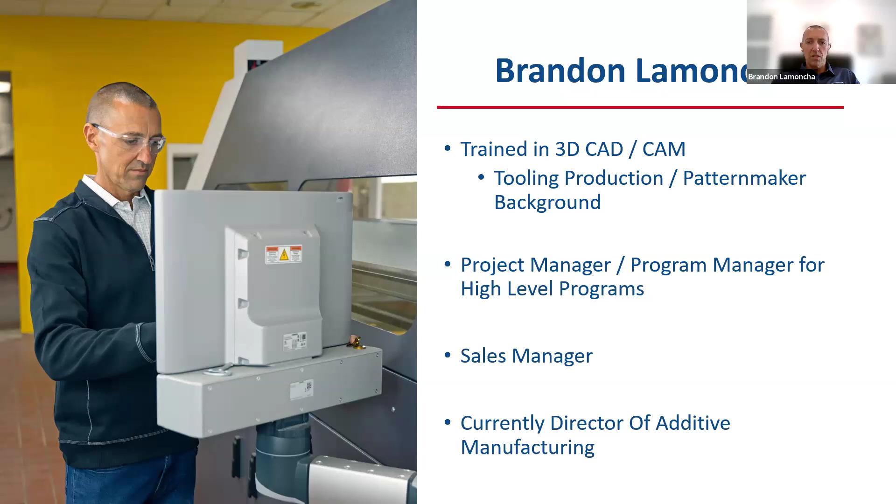As Bo said, I've been with Humtown. My grandfather started the company in 1959 as a pattern shop. I started gluing up segments for wood patterns and learned how to do everything conventionally, then started getting into CNC. So I have a good understanding of tooling. That led me to project management, sales manager, and now I'm currently the director of additive manufacturing.

We would load trailers and ship semi-loads of cores to foundries all throughout the Midwest, typically within a 500-mile radius, but sometimes further. I mean, we've shipped conventional cores all the way to Mexico for prototype projects.

So that's who we were. We were a core manufacturer primarily. We used to make CNC patterns and hand patterns, but we no longer do that. That building now is just a service shop. We keep our core boxes running good, changing out vents, cleaning them, et cetera. But we have no more CNC capabilities, and we'll talk a little bit about that in our journey.

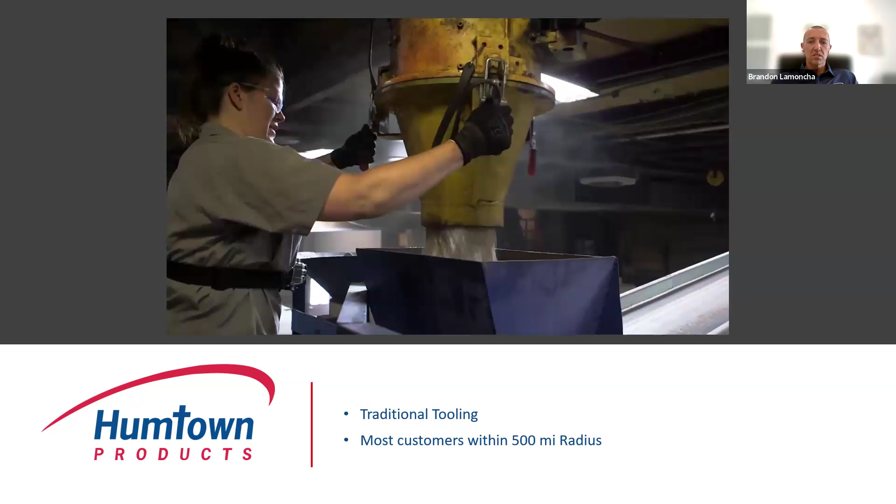Many of you have core rooms in your foundries or you've been in them, but rows and rows of tooling. Every single geometry needs its own tool, which is obviously a large investment. Sometimes Ren board, sometimes iron, sometimes aluminum boxes. But we have a central mixing station where you mix the sand and put the binder in.

And send that off to each core machine. It has a magazine - this is a horizontal blower. The machine closes, the sand is blown in under air, and then the gas head comes over, and we use dimethylethylamine gas to cure the cores. And you're able to produce a core rather quickly, sometimes in less than a 1 minute cycle time.

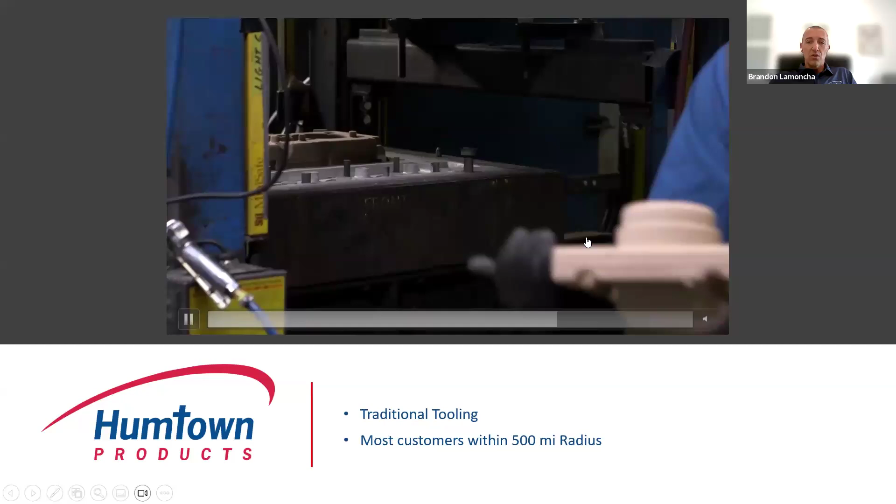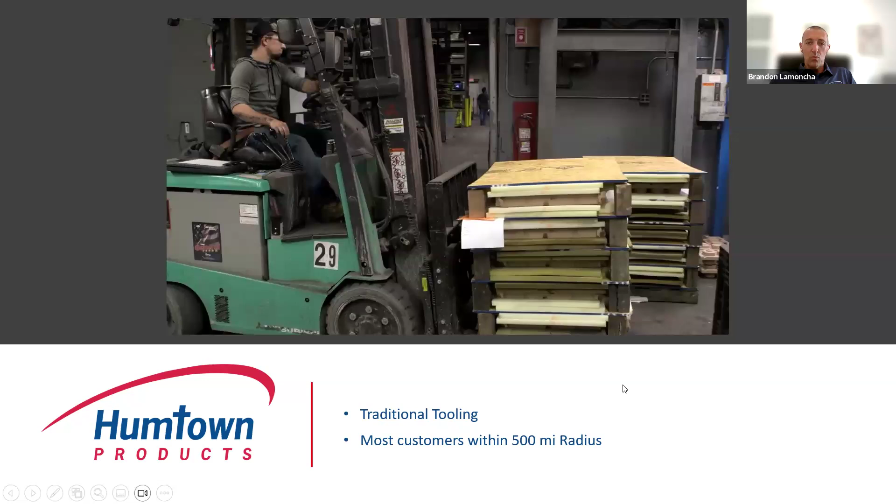So this type of core making is still - we make cores every single day at Humtown, just like you make in your foundries, and we supplement foundries on core supply, and it still works really, really well for high volume. Today we'll talk a little bit about where we're transitioning to 3D printed cores versus conventional, but that was our process for many, many years.

When this all started, just like you on your journey, we started looking at what is additive manufacturing. We started this journey back about 10 years ago now. Started looking at it primarily for tooling, and as you see on the right, we have a core box here with some intricate loose pieces.

Typically those would have been CNC machined, 3-4 axis machining, multiple setups, and very time consuming. So we started making stuff on a MakerBot and just tinkering around, seeing what could we do, how could we do it, what were some ways of process improvements for making tooling and inserts and loose pieces, and it worked really good.

And then we jumped up to this Stratasys machine, which you see here, which was a very good piece of equipment in its time. The consumable costs got to be really, really high, and they were kind of locking down their consumables. So we ended up pivoting to what you see here on the left.

We saw the additive manufacturing binder jet process versus the FDM, being able to actually skip the entire tooling phase and just jump right into 3D printed molds and cores that we could then supply to a foundry. They were able to take those molds and cores and literally pour a casting in days. So this really caught our attention.

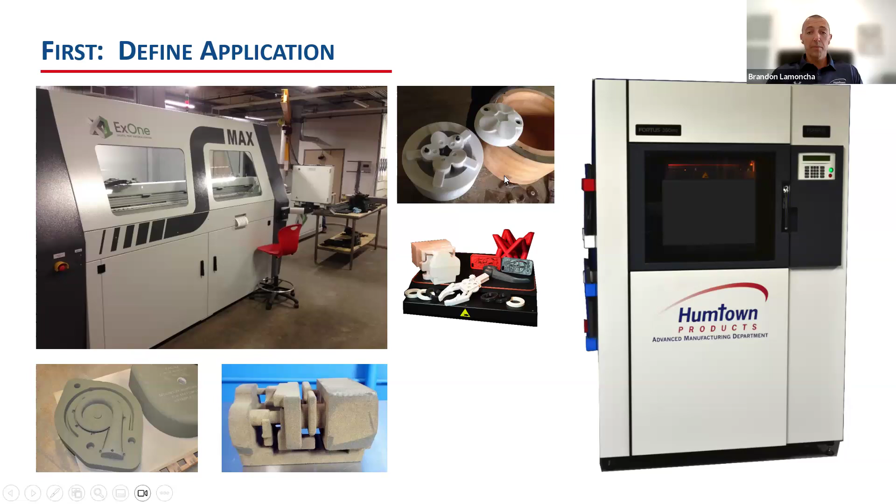We no longer have the Stratasys. We no longer make tooling. Now we're all in on binder jetting of silica sand, and well, we'll talk about some of the other materials.

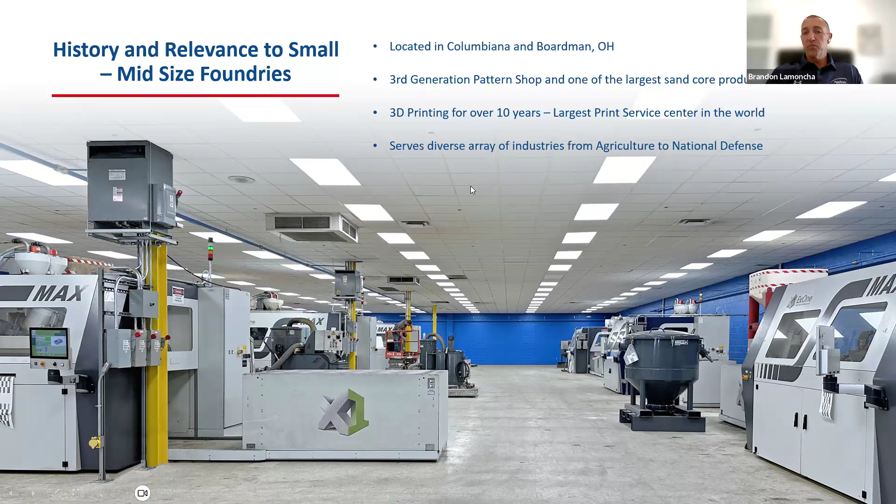But this is a little bit about us. We have two facilities, as I mentioned, one in Columbiana, one in Boardman. This is our third additive manufacturing facility - we'll talk about that journey and how that looks. Like I said, we're third generation, one of the largest 3D print service centers in the world, and we serve industries all across the spectrum.

Early on in this journey, as many of you are looking at either getting machines or maybe just getting your first or second printer, we saw that there wasn't a huge adoption of additive manufacturing in the industry. I would go out and purchase cores from ExOne or one of the service providers, and we would do the design, or find the application, and work with our local foundries to get it printed somewhere and then bring it in.

And we saw the benefit of it right away. Hey, we don't have 8 to 10 weeks to make tooling. We can make highly complex cores.

What we wanted to do is get more and more people understanding that this technology exists, but we didn't know how to get the message out. So we approached America Makes. We were very fortunate to have one of the first innovation institutes placed right in Youngstown, Ohio, in our backyard.

So we went to them with this dilemma. They were asking for project calls, and we said, hey, we want to use this technology more, but these assets are well over $1 million. We don't have the capital. We can't secure a loan. At that time, nobody would loan on this bleeding edge, cutting edge technology.

So we said, how do we go about this? We put this project call in. We were assembled with a team. Our team, it was incredible.

We had obviously the AFS, we had some local foundries, some local pattern shops, some large OEMs like Caterpillar, resin and coating companies like Refcotech, and some really great partners like University of Northern Iowa, Youngstown State University, YBI, even the machine manufacturer ExOne. So we all came together and said, how do we solve this high overarching problem?

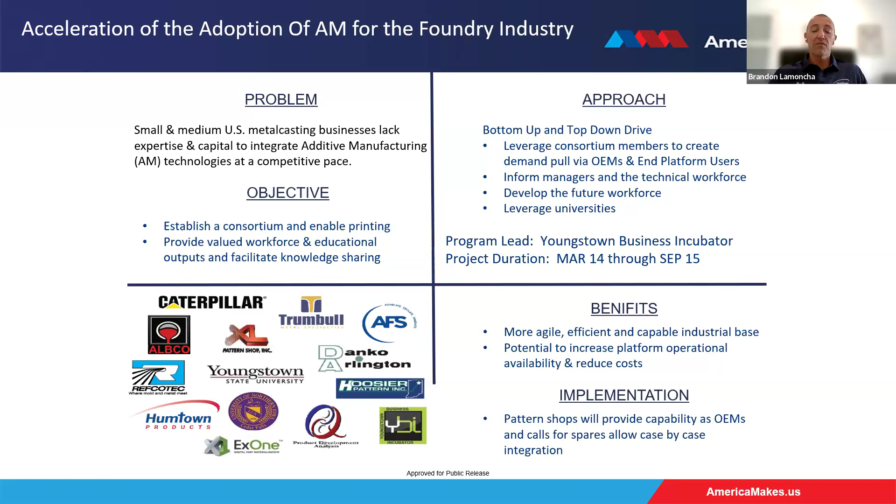So a really good team came together to talk about this, and what it ended up doing was actually getting the first printer through Youngstown State University for another project call, and that's kind of how we got our footing in this technology. So team-based approach. We didn't know where to start, so we came together and used an organization like America Makes, AFS, to build this as a platform or a bedrock.

So for some of you that may not understand what binder jet 3D printing is, no problem. Very simple process. We basically lay down a layer of activated sand. So we take silica sand, ceramic, carboceramic - some of the trade names - but ceramic or silica media. We mix it with an activator.

That's all activated. It's all spread out on the bed. The print head comes along much like your inkjet printer at home. Instead of having HP ink in there, we actually have a binder, a Furan binder. There's other binders - we can talk about that later - but we primarily at Humtown are only using Furan at this time. Basically, the print head deposits that just like on a sheet of paper.

It shows what it wants to print. What you see here, the green, that's actually being deposited. That's what's going to become the core or the mold, and then that process repeats over and over again. 700 millimeters tall, and we typically do that at like a 0.28 millimeter layer thickness. So the job box takes roughly 18 to 20 hours to complete.

We depowder it. All the white that you see is loose sand. We vacuum that away. You're left with the green, and that's basically your core or mold.

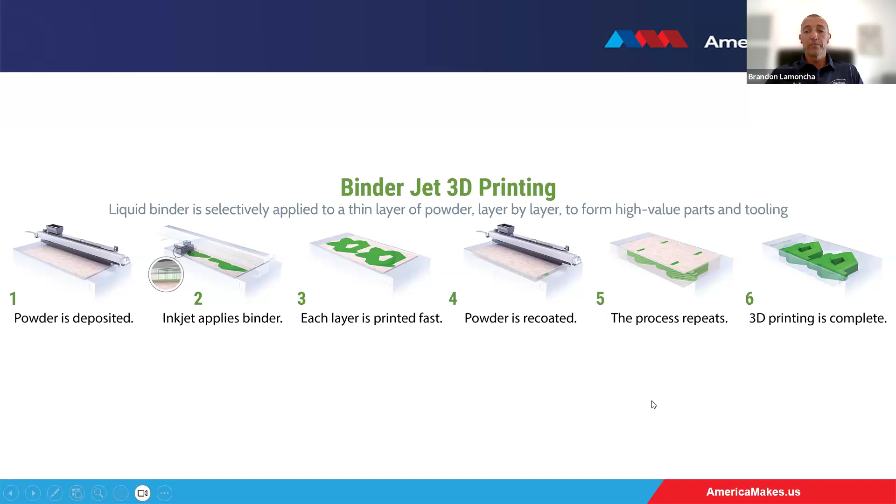When we got into this, as I mentioned, in 2014 these were the players in the space. If you wanted to buy molds at that time in the U.S., you basically had to either go to ExOne, the machine manufacturer, or Hoosier Pattern. That was pretty much your options.

We started as Jerry Thiel at UNI put his first printer in at the university. I drove out there, met with Jerry. He had this technology, but he didn't have someone to actually go out into the industry. So I said, put me in, coach.

So I started driving all over the country, printing molds and cores, and getting these cores and molds many times as samples or very low cost projects, getting them into foundries so that they could pour metal and get a casting and show the people in their organization the value of additive manufacturing.

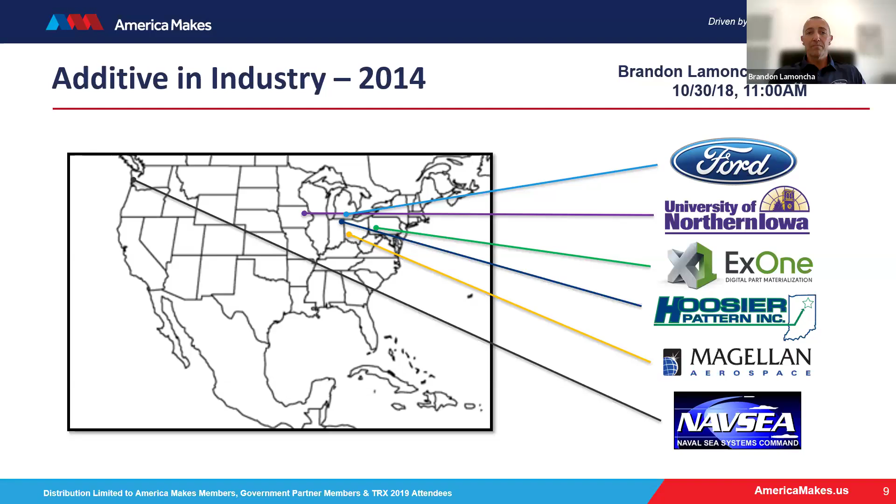Now, since that project and over the years, I need to update this - this slide was back in 2022, but there are several more. We know we have over 100 printers in North America, Mexico, Canada. They're all over - OEMs, universities, foundries, you name it. They're there.

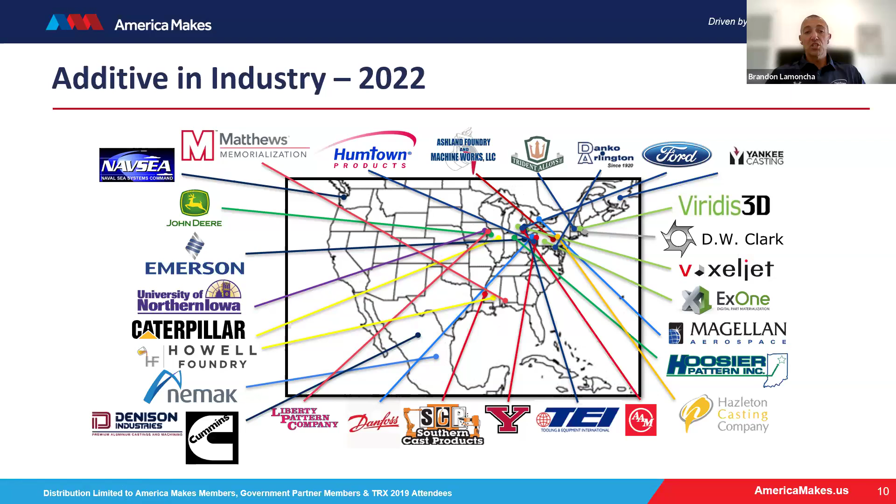This has been a really good, very quick adoption, I would say. Once we got the ball rolling, there's hardly any foundry now that hasn't used or seen a 3D printed core. That's due to some of the work we've done, but also suppliers in the industry like Hoosiers and Matthews, and OEMs like Cummins, Emerson, and Caterpillar have done a great job putting these machines in and showing the industry what they're looking for in application and design. They've done a really good job of educating the industry on what they need and how to achieve it. So this was our first facility for 3D printing.

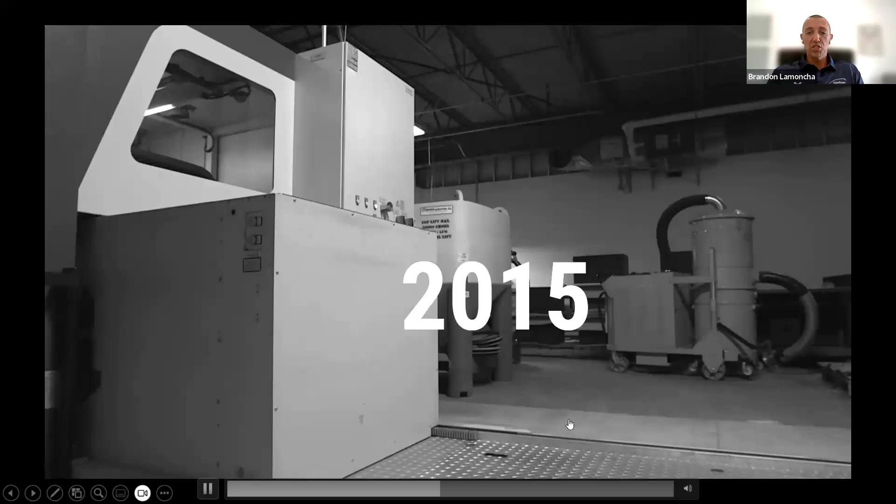We were maxed out where we were. We thought we were going to have a lot more engineering and design, and we only put one printer in through the help of Youngstown State University and the America Makes project. We put that printer in at the end of 2015, early 2016, and started printing, and it was an incredible success—or incredibly lucky, whichever way you want to look at it.

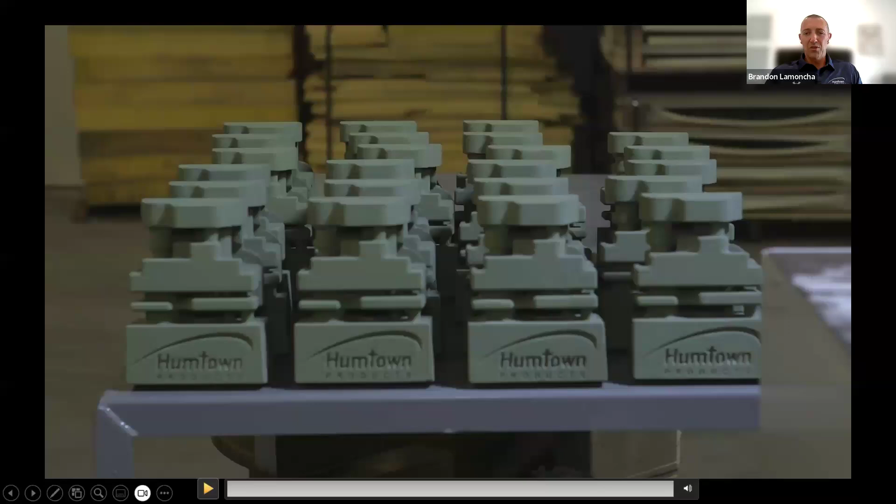We had some customers that were really pushing this technology, some OEMs. Basically, from the time we started printing, that machine ran 24/7, 365. It was incredible. My father and I would go in at 1 o'clock in the morning to clean the machine and flip it over to get the other job box in. It never stopped. I think we still may possibly hold the record for a Furan printhead—over double the recommended life, but it just ran, like twice the life expectancy. So we were very fortunate to get in at the right time when these OEMs and customers were starting to really use the technology.

So we put that machine in, and it quickly took off. What were the benefits? What did we learn by putting that first machine in? Why were we so successful, or so lucky?

Conventional tooling at that time took 12 weeks. Now I'm hearing pattern shops are out 12, 14, 16, 18 weeks. You judge for yourself—maybe you have your own pattern shop and can get tooling in 12 weeks, or 8 weeks, or 4 weeks, and that's great. But what I'm still hearing is that tooling takes a lot of weeks—4, 6, 8 weeks.

We were able to do that, but we were also able to get a casting made using 3D printed sand—with the design, the gating, the simulation, everything, inspection—and get a finished part to our customer in less than 3 weeks. What that did was allow us to get that part to them, get it machined, get jigs and fixtures set up, even in parallel while they were making tooling. And if there were any design changes or iterations needed, they could scan the casting and make that change possibly before they even finished cutting the tooling. That was one of the biggest benefits we were seeing at that time.

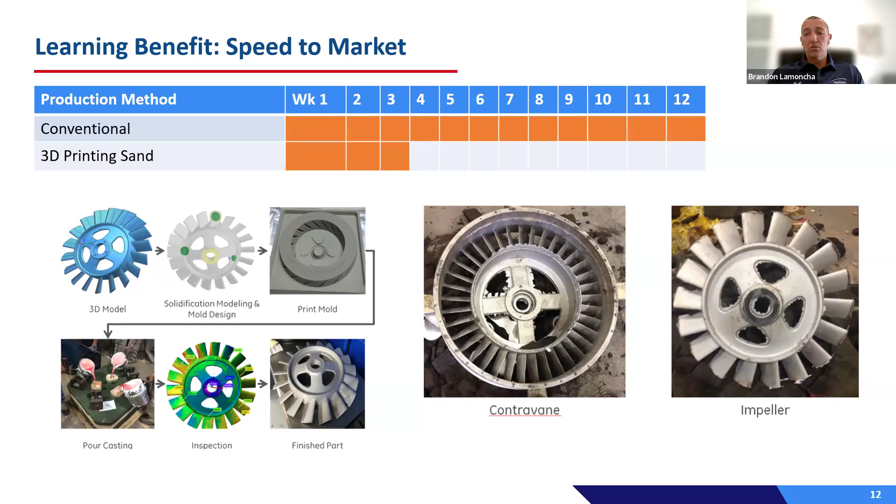New product introduction and prototyping—that's what was really taking off early on in the technology. Then we learned about the benefit of consolidation of parts. When we started taking core assemblies—taking 8 separate cores that required 8 different blow cavities, whether that was 8 individual core boxes or 1, 2, or 3 family boxes to blow all those cores—then bringing those back to an assembly room with jigs, fixtures, glue, scrap. And think about taking that back: one core breaks, and you have to go back up to your production room, set up a core box, and blow 20 more cores because they went scrap in assembly. It was a nightmare. So this is the second sweet spot, but we're starting to see this now even overcome new product and prototyping. That's really what's getting Humtown and a lot of these 3D printing companies into serial production. So I implore you to go through your foundry, start and finish, or the core assembly room.

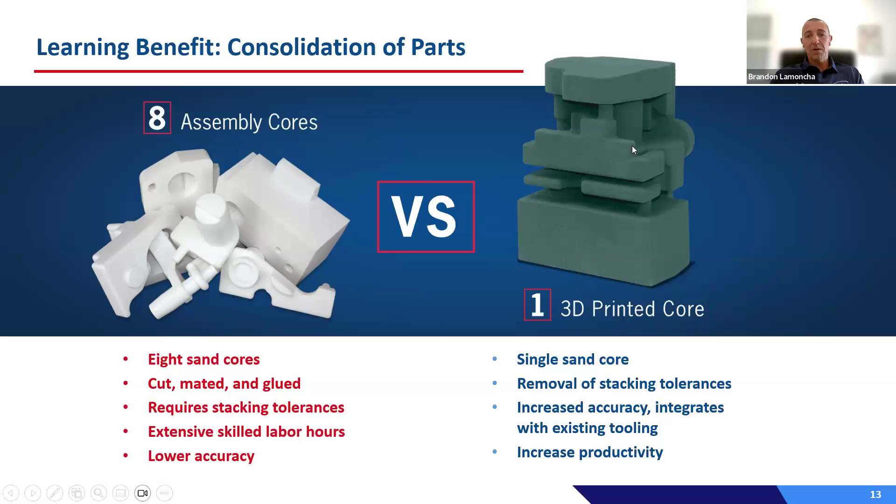If you're doing assemblies and it fits in your hand, I can almost guarantee you, if we did a time study and a case study on it, this core was so much less expensive 3D printing versus doing the assembly. So once this started taking off, it really started to grow in our journey, and it really started to fill up 3D printing machines.

So a lot of people would say, oh well, are you able to do large prints? And yes, the answer is yes. This is me, I stand about 6'4". That mold package, I think it was over 31 different prints, or 31 different pieces, between the outside mold and the cores, and it was pinned and bolted together. You can see the all thread and the bolts. This was made, I think it was over a 6,000 pound casting.

At that time when we were doing NPI and new prototyping, we were starting to see a lot of use with 3D printing, because imagine the tooling that it would have taken to make all the internal cores. I know I can't show you what the casting was, but you can imagine this is a very large, intricate casting, and we had a lot of internal cores, and to make all that tooling, it would have taken months.

Whereas with 3D printing, we were able to get this mold package within 30 days, a lot of printing, but we were able to get it to them. At that time, it was relatively quick. We had one printer with one job box at that point. Now we have 12 printers in Ohio, and we'd be able to print that pretty much in a week, all the different pieces, and get them packed out and get them there.

This process is incredibly accurate. The machine manufacturers promote plus or minus half a millimeter. We see that a lot, and we've dialed it in on production jobs even tighter.

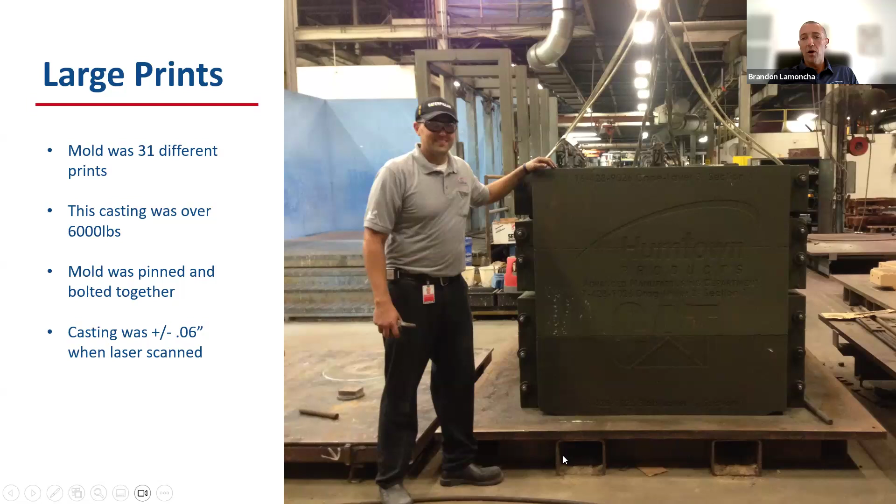So as we're making this journey at Humtown, we're starting to learn more and more of the use cases. We're starting to see, okay, speed to market, great, everybody can appreciate that, but that's just one. And then the core consolidation, okay, makes sense, great. But this was one that kind of crept up on us as a necessity.

We get this tooling in, and I'm sure many of your foundries, you get legacy tools passed down. This was for an aerospace part, and this is probably a 30 or 40-year-old tool. The platform was supposed to be retired, never was. We're still making service parts, and the tool was at end of life. We went back and said, hey, we need new tooling. They said, well, we can't get the budget for that. We don't have any files, we don't have any drawings. All the things I'm sure everybody on this call has heard at some point.

Well, what we decided after about 3 or 4 days of trying to blow this core, using silicone and trying everything we could to create a chamber to blow a shape, we ended up deciding to just pour repro, scan it, got an STL file, and 3D print it.

And we approached our customer. We told them, basically, we're done trying to make tooling or make this tooling work, here's your options. They went to their company or their customer and showed them the option. They had to do, I'm sure, a lot of testing and first article, whatever the case may be. But now the production method of this part is a 3D printed core, and it's working very, very well.

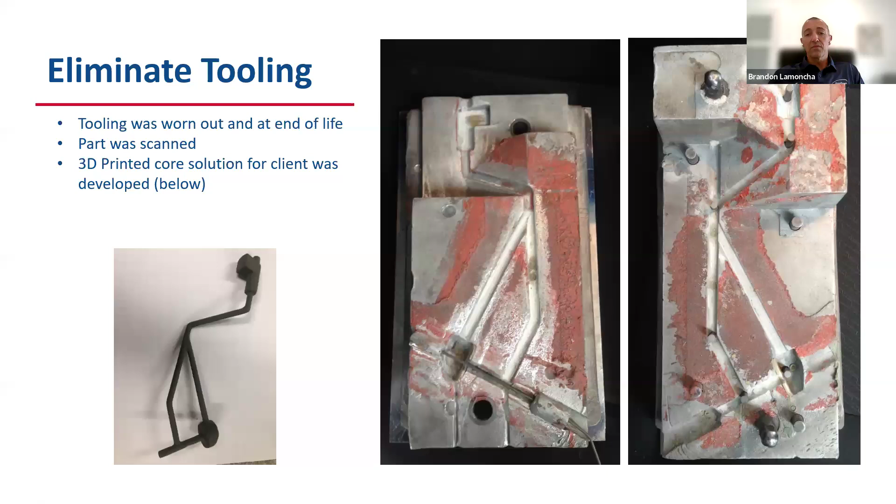So this was another use case. As you are taking your journey, you're going to have different, but a lot of us in this industry are going to have a very similar journey in finding use cases for additive manufacturing. So if I can help you in your foundry, or look at your OEMs that have problems like this—lost tooling, damaged, worn tooling—additives can really be a solution to those, as well as some of the other obvious ones.

We do a lot of hybrid projects now. 3D printing is still expensive. I'm sure there'll be some Q&A on that, and that's fine, that's what we're here to talk about. We're trying to solve those problems with the machine manufacturers, et cetera. So what that's driven us to along this journey is, like, I thought we were going to do a lot of engineering and a lot of printing.

So that beautiful office space sat unused, because what we've seen is more and more of our foundries and OEM partners are doing a lot of the CAD and simulation themselves, and then sending us ready-to-print models. But they're also realizing these molds can get pretty costly and time-consuming to produce. So if they can make a pattern and just use the internal shape, like this turbo housing, to produce the performance they're looking for, that's what we're starting to see more and more of.

So what that's led us to is a huge amount of our projects using 3D printing in a hybrid manner, where you still use your existing pattern. This has been a great find, and it's a way that's much more cost effective for the companies and customers, because they're not having to buy a whole 3D printed mold. They're using their traditional air set line, so this is much closer to their production cost.

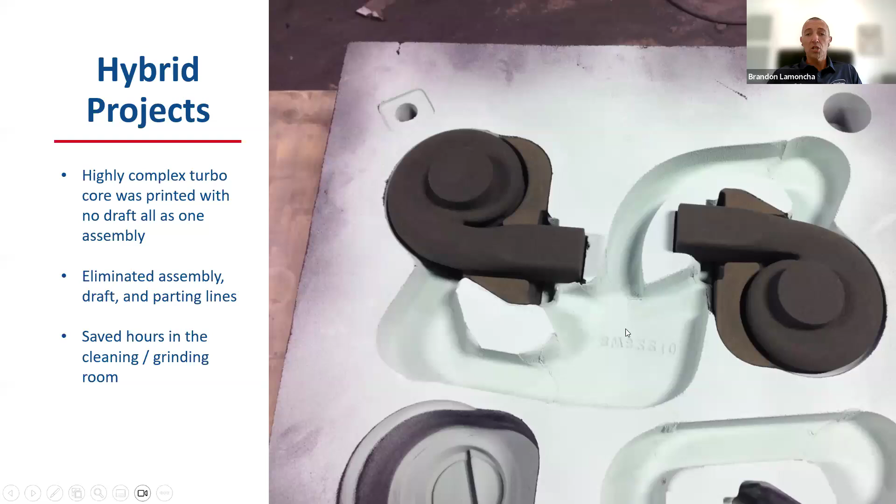Another hybrid would have been this engine application. This was a 351 Cleveland block, and basically they wanted us to go ahead and make a different cooling channel. It was either overheating, or they were trying to push the performance, or thin wall. We wouldn't have been able to blow this core conventionally. It had some really thin areas where we couldn't get wet, sticky sand to fluidize and get into those areas.

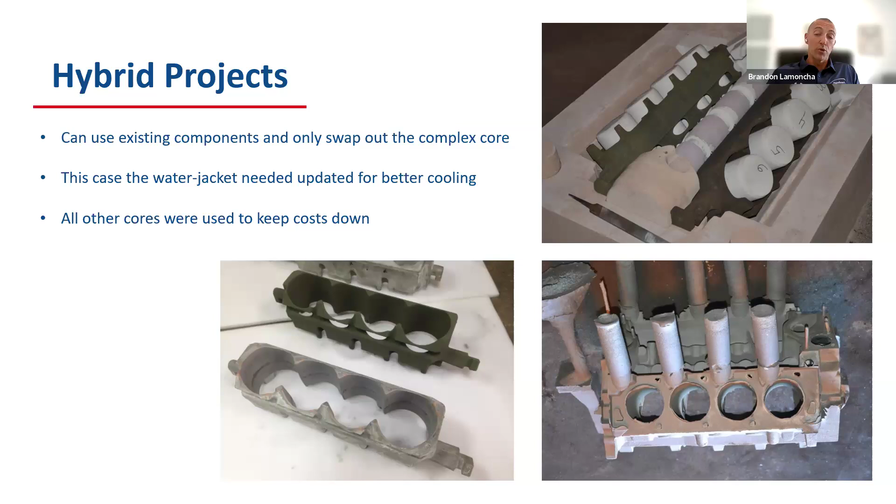But what he did was he made some modifications - he poured a plug off of the existing box, made his modifications to the plug, scanned it, and within a couple of days, and for maybe a couple hundred dollars for a set of cores, he was able to have a custom design. Obviously he did the design time in the CAD, but we did the printing, and it was like a couple hundred dollars or so for cores, and he had a custom one-off 351 Cleveland block. So this is just another example of hybrid projects that would be very costly if you went the tooling route, if you could even blow it. But it was solved by additive manufacturing.

So that's what we're starting to see today. We have castings that cannot be made any other way than using 3D printed cores. They're made in a hybrid fashion where it's either a permanent or semi-permanent mold with a core that's 3D printed, or basically just this core, and all the outside shape is made with your regular air set sand. That's what's really pushing us and others into serial production, because even if you could make a tool, no matter how long it took, you still couldn't blow a core and achieve the dimensional accuracy that we were able to achieve with 3D printing.

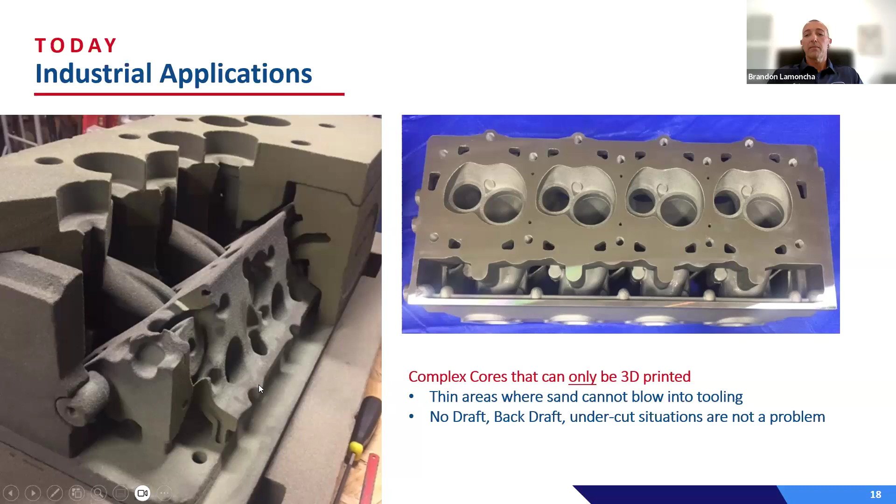So with that being said, that's taking additive manufacturing, and we look at it as a whole. Basically, if you have any investment casting knowledge or operation, they've been doing this for a while, printing wax patterns or PLA, dipping it in slurry, burning it out. So we're not quite as advanced as the investment cast folks, but we're catching up. We've been in this long enough to see that.

People now that haven't used or adopted this technology are really in the late majority. I consider Humtown and some of the other companies on that slide to have gotten in early. I wouldn't say we were developing the printers, we didn't come up with that idea, but we were visionary, seeing that there's something to this technology, there's a reason why these printers are there.

Ford Motor Company was using them to develop things like the EcoBoost engine, making four different designs, casting 20 different blocks, machining them, putting them on test engines, and then going to production with the one that performed best.

There was a reason those were being built, and a lot of people were involved in our AFS additive manufacturing when it was an ad hoc group, as it became a committee and a division. I commend those leaders, and I commend people still jumping in and learning more about this. But we're definitely starting to see more and more foundries and OEMs using this, and we're getting into that late majority.

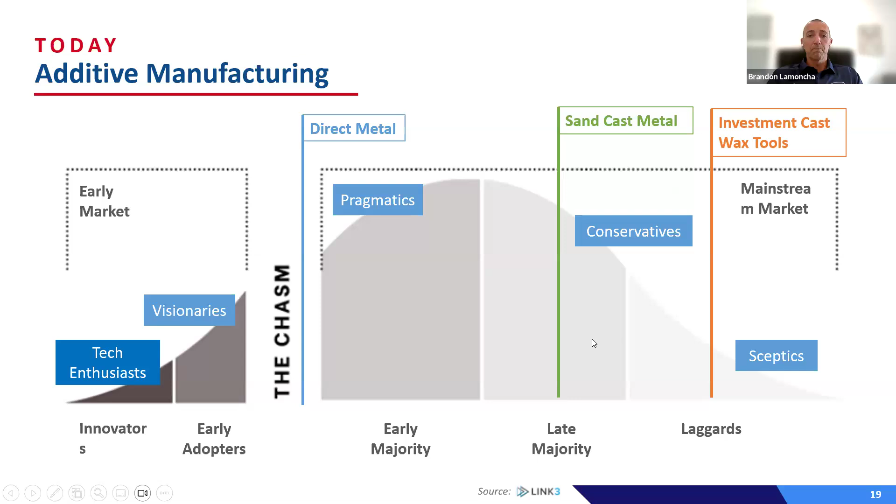This is for the lower power steering unit. The motor stays stationary, and the lower unit turns the prop. Very impressive. I think it was the first, and to this day I think it's still the largest horsepower displacement engine

available as an outboard. So very impressive, the technology. I mean, you can imagine how precise that casting would have to be, and using additive manufacturing for that core helped drive success. I thought that was really cool, that was an AFS honorable mention, and they were able to share that story.

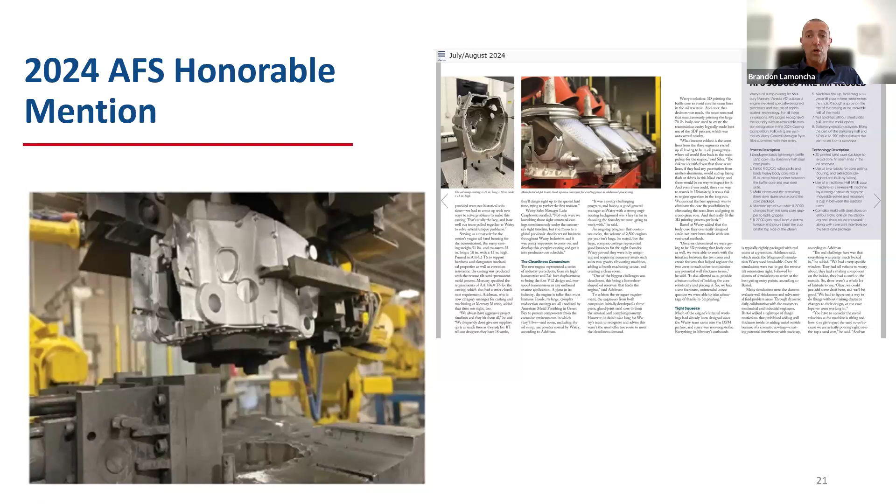As more and more of you see this technology being deployed, and know that there's a supply base out there, you'll start using this in your foundries as part of your technology, part of your solution set to your OEMs, and you'll be supplying OEMs like Mercury, like Ford, now that this technology is working. What we're starting to see, there were rumors that foundries won't be here, that they're going offshore and everything.

I can't say for 100% fact that it's because of additive, but I think it lends to the discussion. So I think we all just need to be aware of that and understand what our foundry is really good at. What can we use this technology to help advance us, so that OEMs, or whatever product is being produced, it lends us to being a supplier to that OEM. And how can we use, whether it's 3D printing or other rapid or more precise manufacturing methods, in our organization to improve our value to the OEMs.

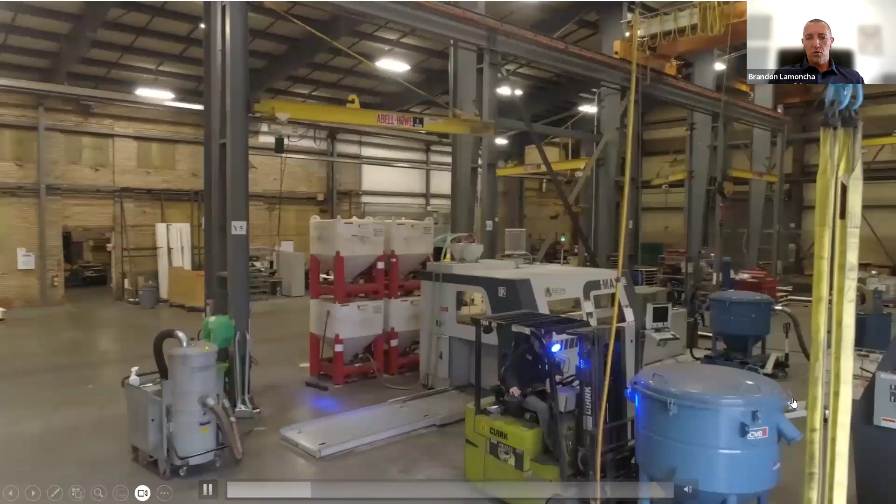Here, let's fast forward a couple of years. This is our second facility. We leased this space. Primarily what you're going to see on the right-hand side is our printing area. Some of this was packaging and storage, but this was when we got our second machine. This area, as you can see, was very laid out, had packaging, clean chemicals, and our sand storage for the day and for the week was there.

But in a really quick time, you're going to see that was 2019 that we moved into that space. As I mentioned, this is pretty much the print room. It was filled with printers, but we had some of our packaging returned, and a lot of this space up here was not ours. This was kind of a mixed use leased space. But you can see from 2019, when we moved our second printer in, because we outgrew the first facility, we moved our second machine in 2019.

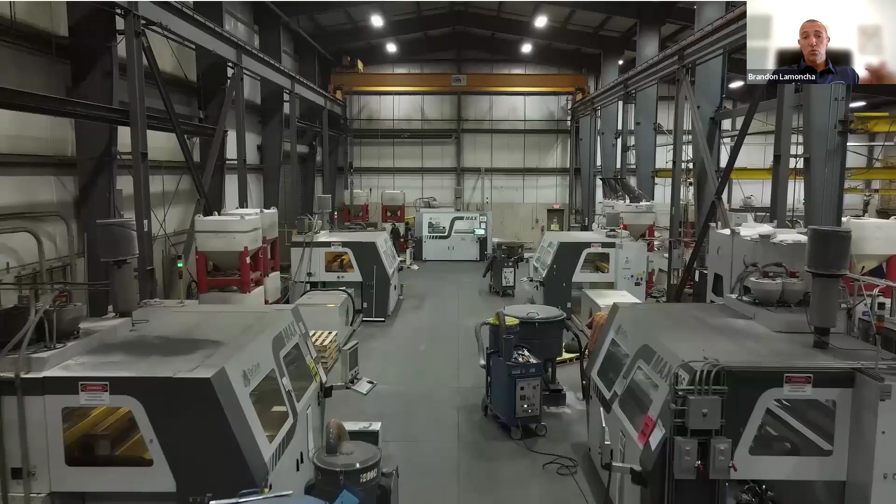Fast forward to 2022, let's go through here and count. We had 2, 4, 5 in this bay, 6, 7, 8, 9, 10. So at that time we had 10 printers in that building, going from 2019 to 2022. So you can see how there has been an incredible amount of growth in just a very short time in additive manufacturing.

We grew organically. We didn't have large investment. I will talk about it, but we have several printers that are managed assets, so they're not all Humtown owned. But we had to really pace our growth, because there were times when there was more work than we had printers for. We were on 24/7, actually 24/6. The 7th day on Sunday is usually optional, not mandatory. But the printers run.

So we had people leave at midnight essentially on Saturday after getting all the printers running. Sometimes we'll have people that volunteer to come in on Sunday to keep the printers clean and moving, but they can run basically 18 to 20 hours. So they would just get them all running when they left, and then when they came in Monday morning, they're basically all ready to empty. But still, this was a very rapid growth of this technology.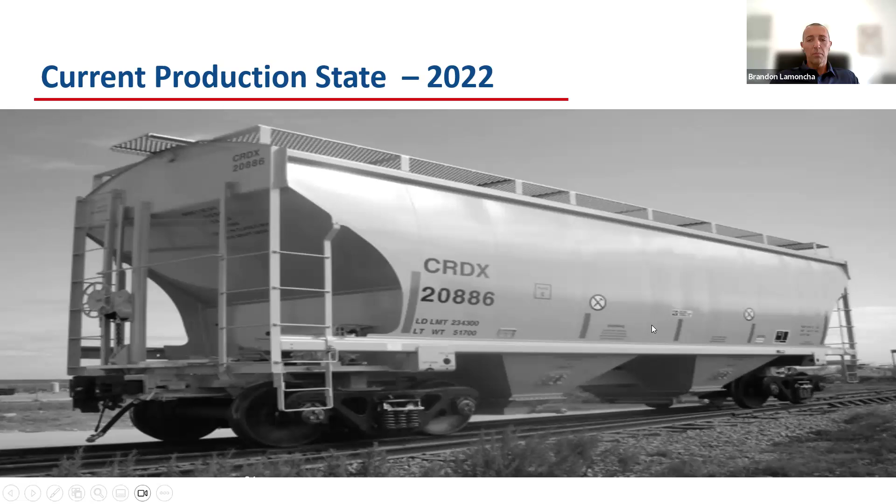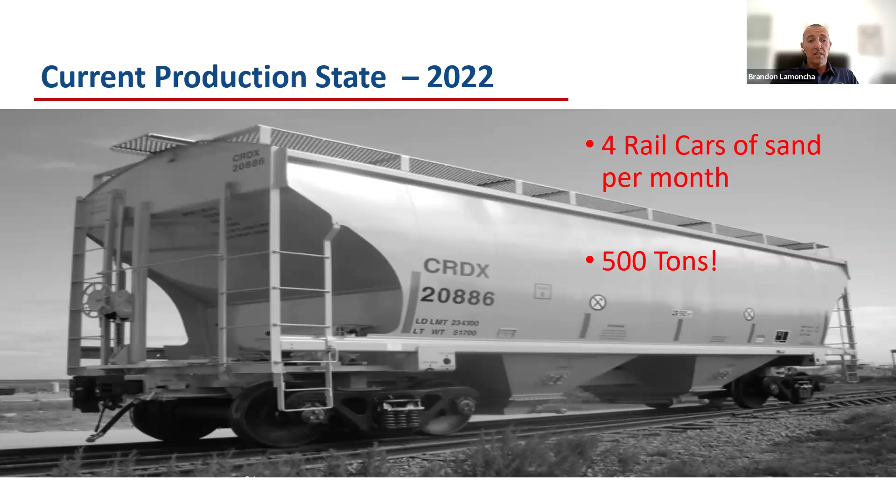So in 2022, like I said, there's a couple of slides here I need to get more updated, but we had 10 machines in there. Now we have 12 machines, so it's gone up a little bit. But we were going through 4 rail cars of sand per month, 500 tons of sand, which is absolutely incredible. And this is not just for prototype anymore. This is serial production, and we're starting to see all the stories. If you listen to some other webinars and come to some of the AFS committee, Grede and some of the other Waupaca, they're putting machines in and they're running production.

So as I mentioned, we're along this journey. We've added since 2022, a couple more machines, and we have a couple more coming. So we did finally decide, okay, we're releasing that space. A space became available, and it had air conditioning, which matters when you're running this process. Any of you that have 3D printers know this production, the process is really, really stable when you have good constant humidity and good constant temperatures.

So finally found a facility that became available for purchase, and we ended up procuring this building. It has roughly 80,000 square feet of production and office space, so we have room to grow and to add printers. But we've also realized that we'll probably hit a cap for what we can do in this area, and we'll probably need to get printers closer to point of need where some of our clients are.

So this is our new home. We just had an AFS tour there. We have the 12th machine in, and we're waiting on some parts to get it up and running, but we do have all the machines installed, in place, and wired in. Everything's ready to go. We're currently painting the floor. This was formerly a Gorant chocolate building, so there are still 3-inch lines of chocolate from when they shut the boilers off.

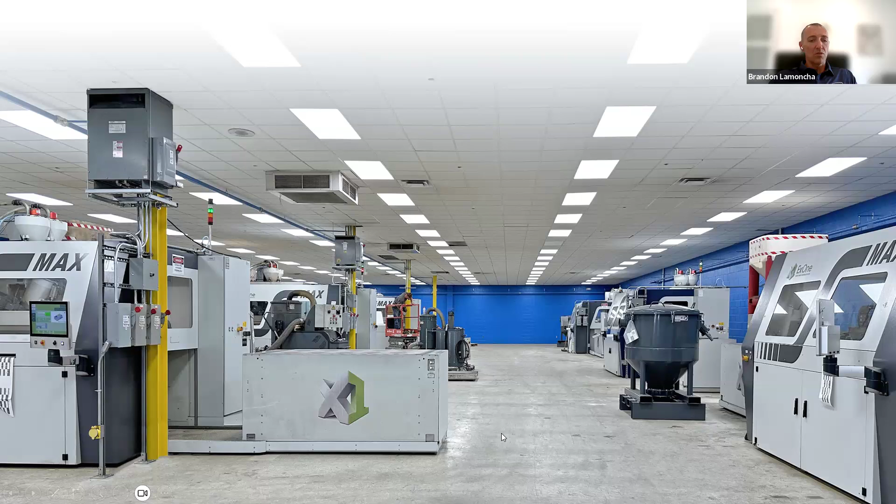It was air conditioned for that purpose, and the employees are very happy about that, as well as the machines in the process. But we had a great tour, everybody that came through was very impressed. We're still finishing up moving in, we literally moved the last machine in just a month or so ago, so we're still kind of new. We had to do some painting, and we're still painting the floors and getting it cleaned up. But I invite you to come and visit us, and we'll show you where we're at on our journey and how we can help. We're very happy about that.

This cell was set up and operational in our other facility. It's been moved over, and we're working on setting it up. But what do you expect to see moving forward as you go on this journey into additive manufacturing for serial production?

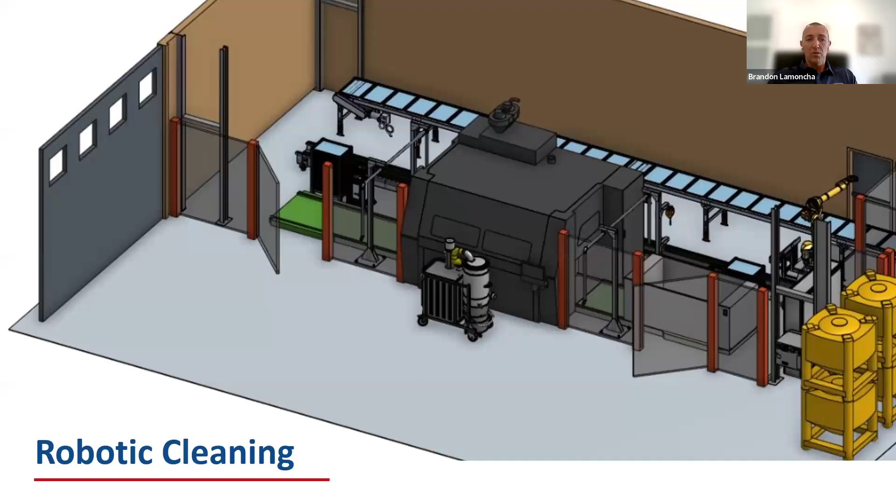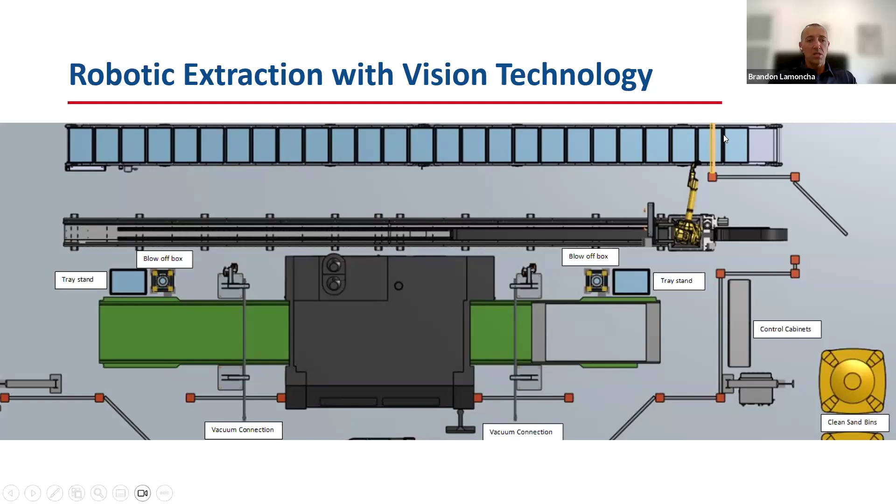We're really focused on robotic cleaning. Some of these jobs, as I mentioned, we're up to 80,000-90,000 EAU of parts, and that's a lot of pieces for people to have to manually reach in, grab, clean, inspect, and put on. So what we're starting out doing is we have 2 job boxes per machine. The robot can shuttle back and forth, it will vacuum the parts, pick the parts, and then put them on this conveyor, roughly 80-90% cleaned. So it does reduce a lot of the labor, and it does that all automated with vision.

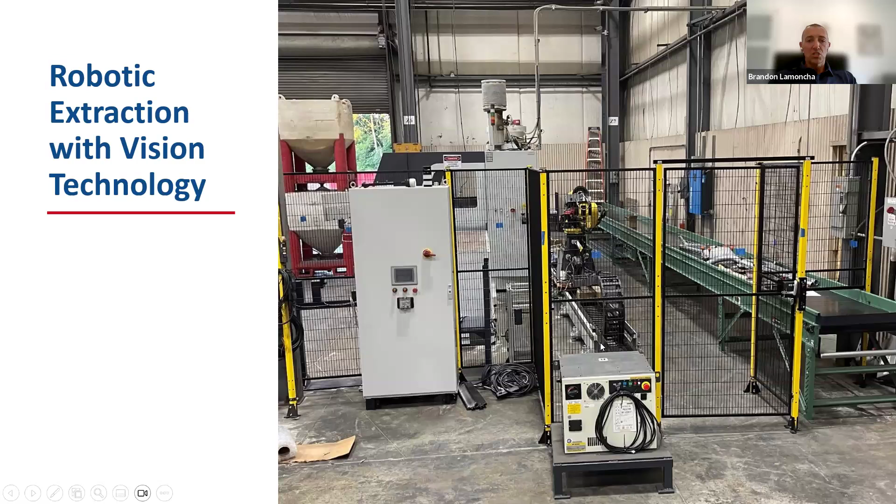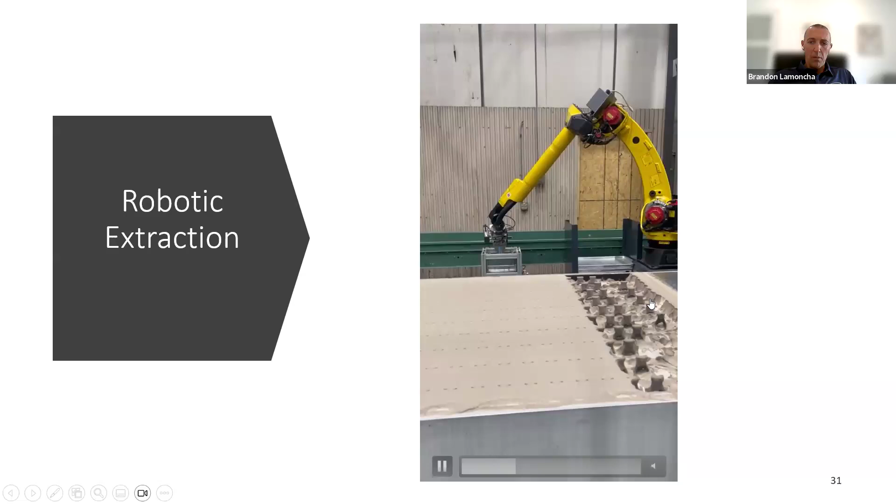So we had this cell, we brought it in, had it all set up, caged in, and we did our runoff. Very, very happy that it worked, because a lot of integrations and things don't always go smooth, but there was a lot of room for improvement. We've actually come up with a few ideas just by doing the initial runoff. We have a blow off box where the air would blow off some of the sand and do a partial clean of the cores, and then it would set it on that green conveyor in the back. Prior to this video, I didn't catch it, but it actually went in and vacuumed enough of the part so it could see where they are, because it knows where they're all at in CAD. So anyways, this is one of the things that we're looking at.

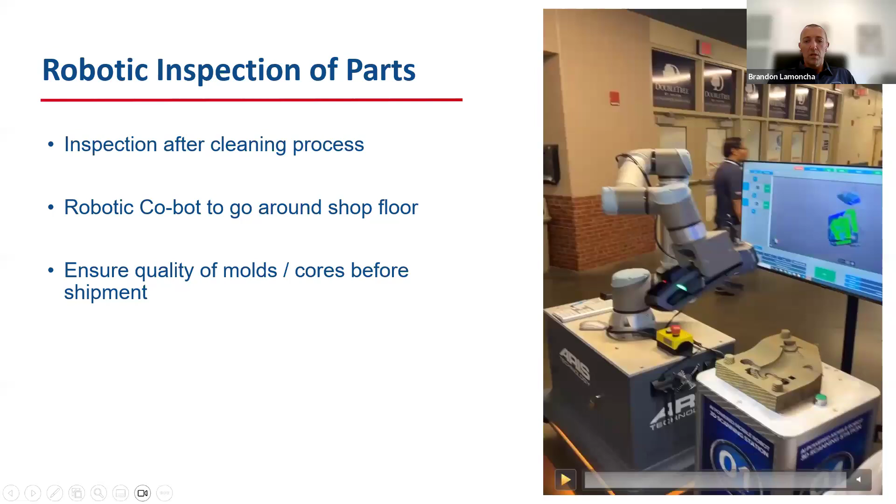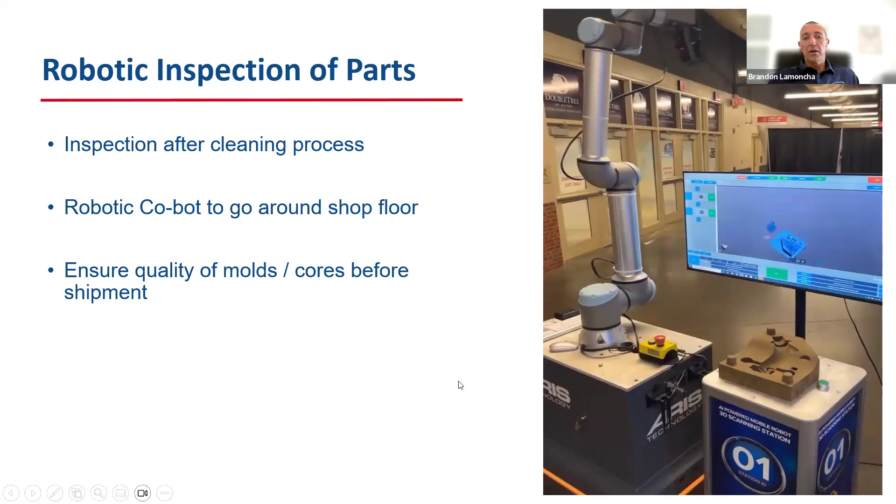The other is inspection. As we're doing more and more higher profile work, we're constantly being asked what are we doing for inspection. We're working on this, we don't have it yet. This was a company that came in, and we were doing an inspection - it was doing a color map overlay scan of the part. I've also worked with some CT, because we have a lot of really complex internal chambers, so we're working with them as well to see the internal. These are some of the things that are up and coming. Like I said, we don't have this yet, but we know as we get into more and more serial production inspection - we had castings at our customers that were running 100% CT - so we know as our customers have to up their performance, inspection, and reliability, we're going to have to do the same. So we're preparing.

One of the biggest things that I've learned as I've worked with clients - as I mentioned, we have 4 machines that are managed assets. One's for a university, 3 of the other ones are all OEM. So we print and we ship to wherever they need it, whether it's Foundry XYZ or Foundry ABC. We take their cores, we print them, and we ship them to their location.

There's a lot more to additive manufacturing and 3D printing in the foundry industry than just buying a machine. Equipment's great, you come into our facility, you're going to see them, but they require maintenance just like every other core blower, core machine, or molding machine you have in your foundry. There's some differences though - as I mentioned, the print head, you need to run it all the time. So if this asset needs to be used, but you're only using it once a month, it's going to be very problematic when you're running binder through these orifices smaller than a human hair. We had OEMs that wanted the ability to have quick response, but when they went to turn on the machine, they found out it's not going to run because the print head's clogged up, and they can't get a print head in for a couple of weeks because it's shipped from another country, maybe in Europe.

So it was very problematic. What they did was, instead of placing it in a location where it would only be used once a month, they actually moved it. We helped them facilitate taking it down, putting it on a truck, and driving it to our facility. We get it up and running, do any maintenance needed, and then we produce for them. Whenever they're not using it, they always get first use. We take that unused capacity, help them by running it and selling that unused capacity. So it's basically a NetJets model.

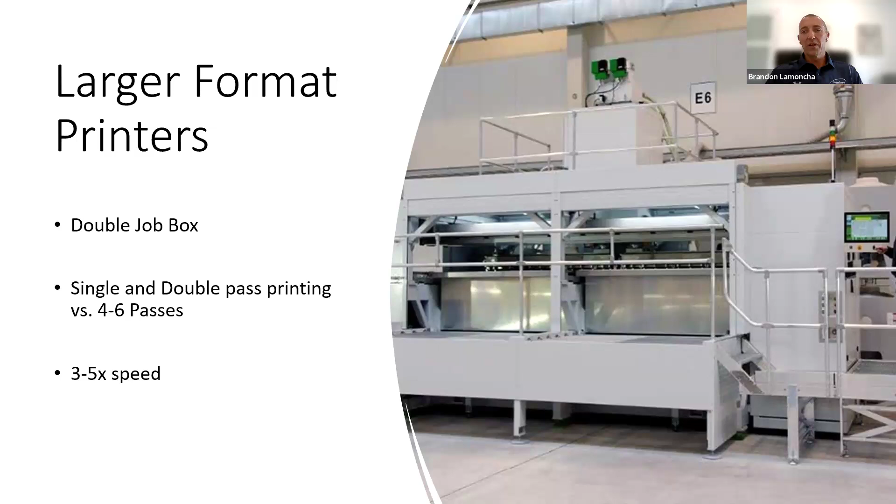So we guide and help our customers and clients understand that, if and when they decide to take that journey on their own—we've set up machines in the United States and Mexico, we've helped OEMs and foundries along that journey. What we found is they still work and rely on us, because just like every other foundry, as you've seen with Humtown, we've been a core shop for 60 years. There's always overflow, there's always breakdowns, there's always surge capacity, and we're there to help them.

There are some other types of printers out there, like the S-Max Flex. We've investigated that technology and decided not to go that route. It is available—I haven't heard if they're still selling that piece of equipment, but I've seen it at the shows, so I know it's out there. You've probably seen it at the shows too. It's a lower cost option. They're trying to give every foundry access, and I do believe every foundry will have a 3D printer of some variety moving forward.

With it being basically just a robot with a print head, I went up and saw the technology. The print heads were very easy to change out, just one module, and they showed us how to do that in a matter of minutes. So there were a lot of advancements here, though we haven't focused on it as much since we decided to go a different route. But it's out there, and if you have questions, I've spent a lot of time before ExOne purchased them.

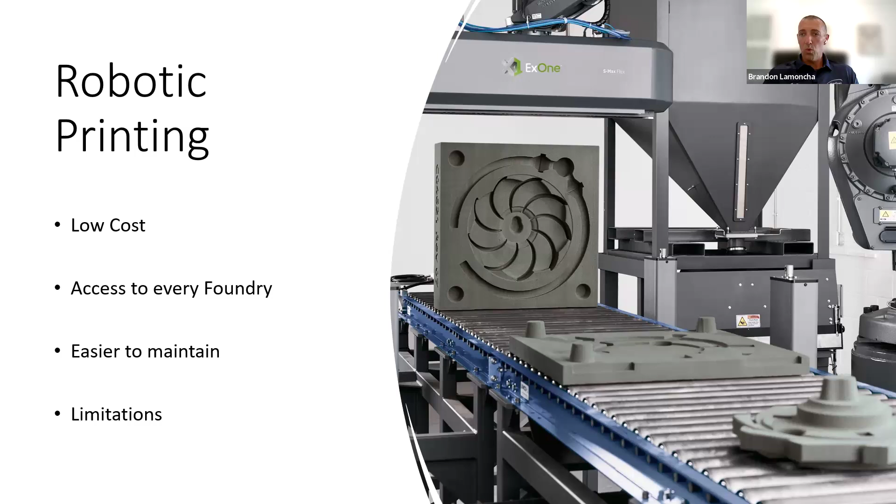It was called Viridis. I've spent a lot of time up there, and with people who have this piece of equipment. It has its purpose, but just make sure you understand what the pros and cons are of that type of printing.

At the last GIFA show, what Voxeljet is doing with BMW, and even what ExOne is doing for BMW in serial automobile production, it's incredible. Robotics—I didn't even put the video in here—they have robotic cars moving job boxes from station to station using inorganic systems. There might be some post curing, some microwave, some robotic cleaning. It's incredible. So the options are out there, but as I mentioned, crawl, walk, run.

We are a job shop, so even though we have some high running parts, we run them on multiple printers. We're not set up just to make heads or blocks for one customer all the time. But even us, we haven't invested in this yet because we don't get enough contracts to justify it.

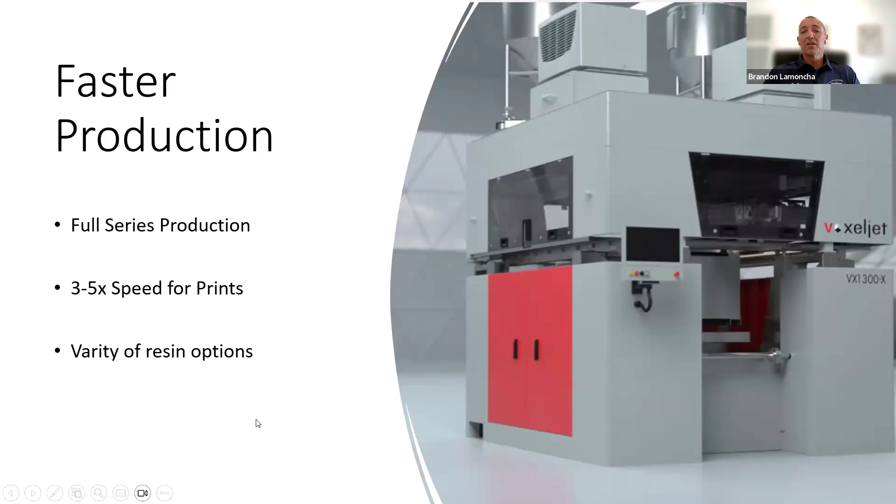So, crawl, walk, run: get a printer, use a printer—whoever it is—buy a lot of cores, then get a single printer, and then phase into something like this. It is out there, it is working. Just do your due diligence.

Lower cost machines—so we've got bigger machines, faster machines, robotic machines, and then lower cost machines. There's not many of these in the industry. I've heard of one, maybe in South America. As for China, we don't have a whole lot of information coming out other than, when you go to the shows, there are Chinese companies making 3D printers.

Very interesting technology. I've seen some of the features, and it's not a direct copy. What I always think is, okay, they're just going to take a machine—and don't get me wrong, some of them are—but I've seen some of these technologies that are not direct copies, and there are real innovations being made.

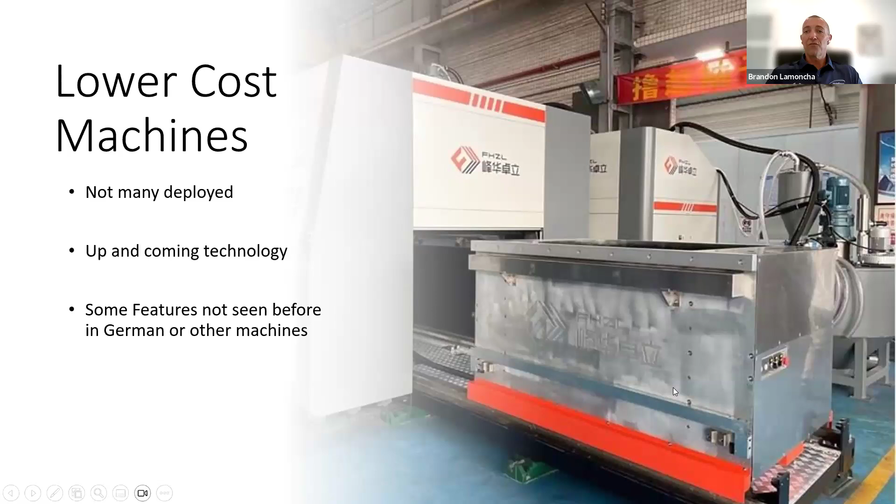So, spend your time, understand what you're getting, and make sure it's going to fit your need in the foundry. To wrap this journey up, what does the foundry of the future look like? I've been to Brembo, I've been to some really large foundries. I'll be the first to say additive manufacturing is a great tool, but it will by far never replace casting.

It will never replace all core making. When I see rotor cores pumping off those machines every so many seconds, I sit there and say, I don't care how fast the 3D printer is, it's going to be light years behind. And the geometry of a brake rotor is so simple for production cars—why would we ever use additive manufacturing there? So patterns aren't going away, traditional molding isn't going away, in my opinion.

But what are we going to start to see? We're going to start to see more digital inventory. Almost every new job is being developed with CAD when it makes sense. A highly complex core—3, 4, 5, 6 cores that need to be assembled—I'm going to start seeing those core assembly rooms go away, and we're going to start seeing the pattern, and then this digital core coming into the foundry to get that casting.

No doubt, that's already happening. Now, what I challenge foundries with, and what I see, is that foundries have a really good opportunity right now to embrace even direct metal printing of parts. We've been looking at the technology for years. I don't think a lot of it's there yet, but there are—we call them cats and dogs in the industry—certain parts that aren't flight critical but have some complexity, and take a long time to get tooling. 3D printed molds and cores are a solution for a lot of them.

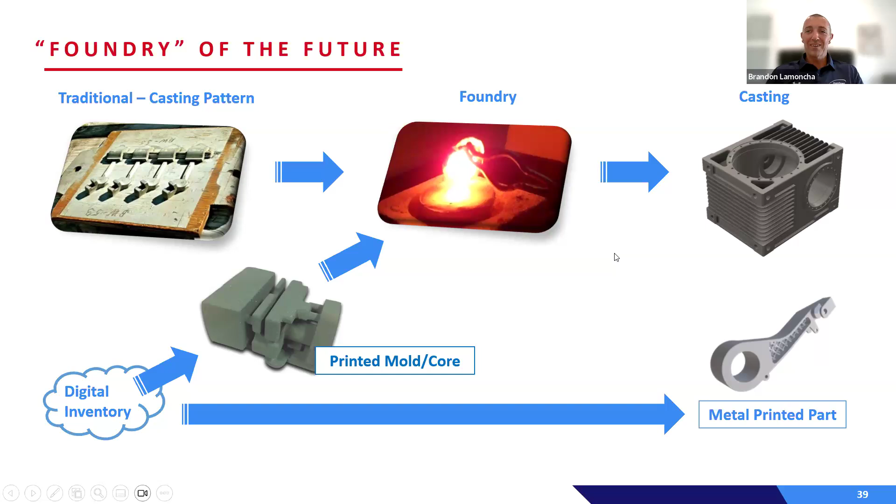And like I said, I'll be the first to say I don't think conventional molding or patterns are going anywhere. I definitely don't think we'll ever see a day where everything's direct metal printed. I don't know, this is being recorded, somebody might be able to call me out on that someday, but we'll see about that.